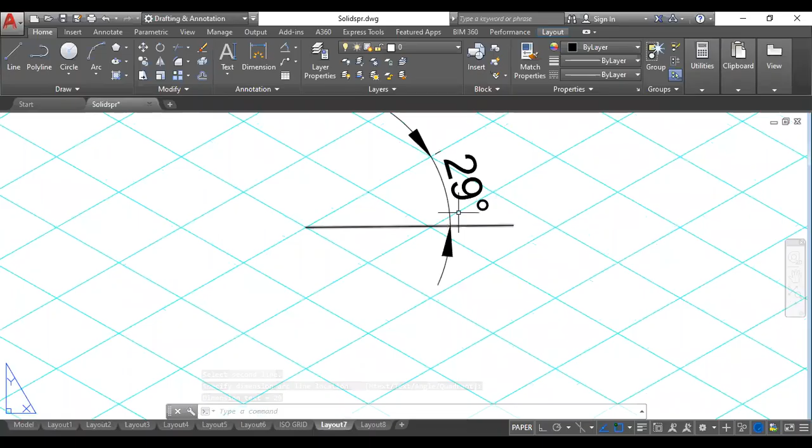If you observe these isometric sheets carefully, if I draw a horizontal line here, and if I measure the angle between this line and this line, this angle would be 30 degrees. It has not come straight, but if you measure the angle, it would be 30 degrees here.

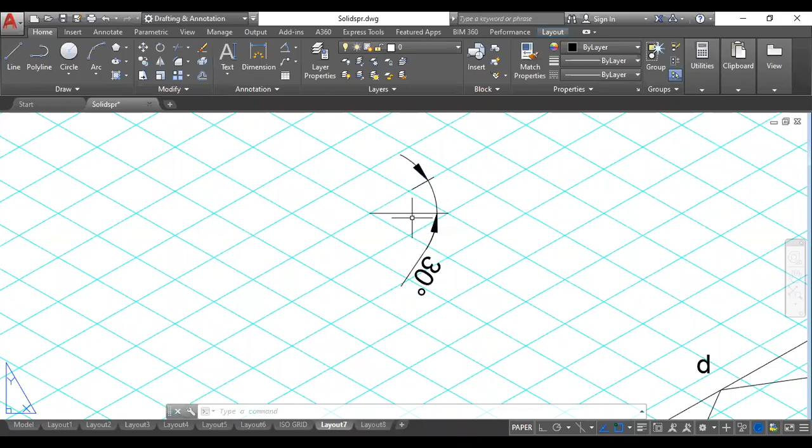So by knowing that this inclination line to a horizontal line angle is 30 degrees, you can do this on a plain sheet of paper also. For example, if you want to draw a square of 30 sides each, let us say I have a square here which is 30 sides. This is the true length.

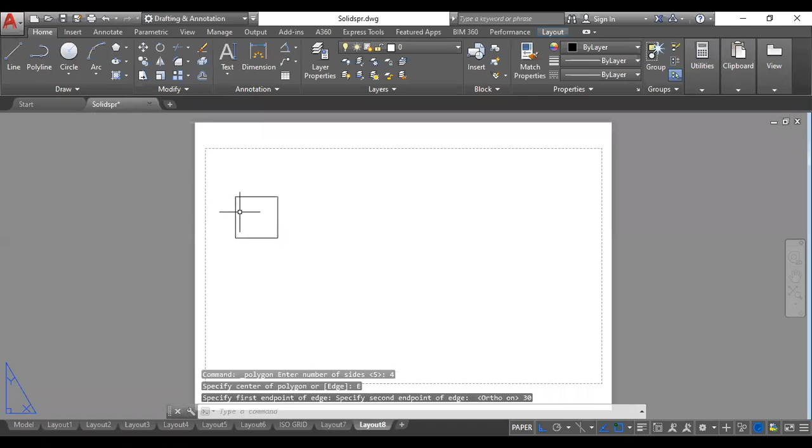So this 30 I want to draw on the isometric scale. You know that the isometric scale won't be exactly 30. So what you need to do is convert that into the isometric scale factor. It means you need to multiply 30 with 0.8164. This will give you 24.5 millimeters.

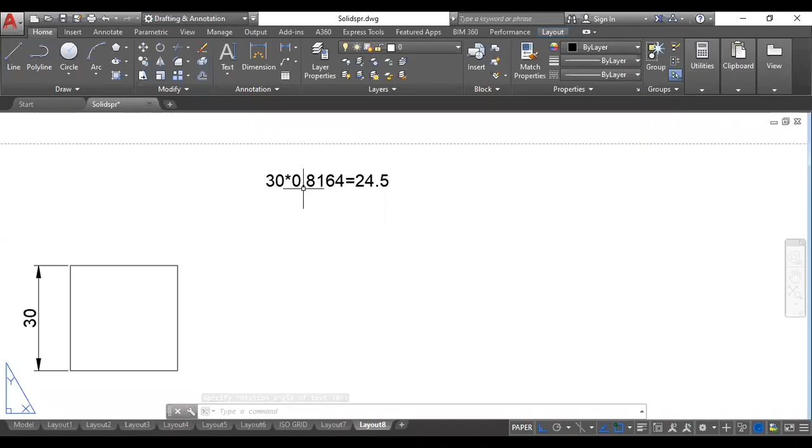So whatever this 30 length you have, you multiply it with the isometric scale factor, which is 0.8164, and you'll get 24.5. It means 24.5 is equal to 30 in actual length. So 30 in actual length is 24.5 in isometric length.

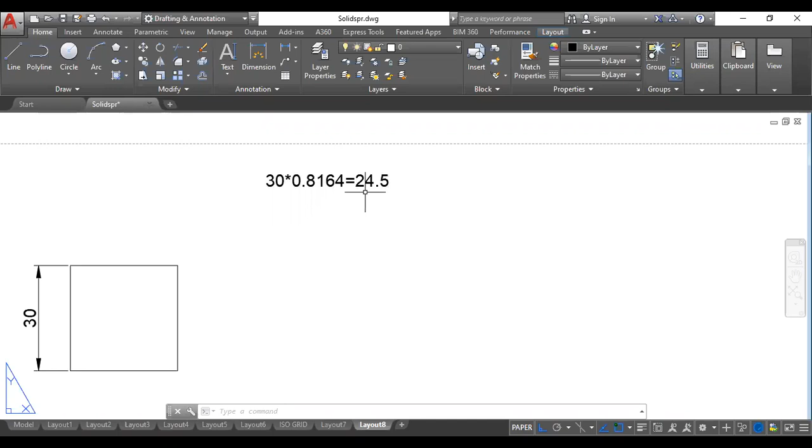So if you don't have the grid sheet, you'll have to convert the true length to iso length. 24.5 is the iso length. Now you can do it easily. Take a line command. In your manual sketch, you will draw a line of 24.5, and the angle with respect to horizontal would be 30 degrees.

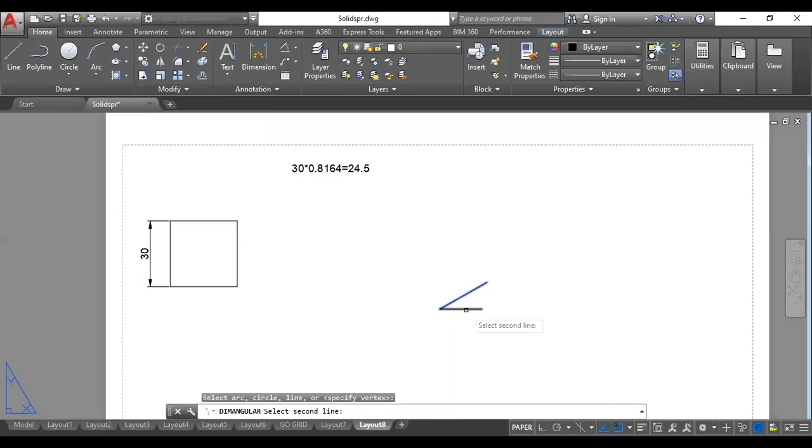If you see this particular line, the inclination with respect to this horizontal would be 30 degrees. So this is 30 degrees. Then, on the other side, from this endpoint, I want to go this side now. So this is again 24.5. Now this inclination would be 150 degrees.

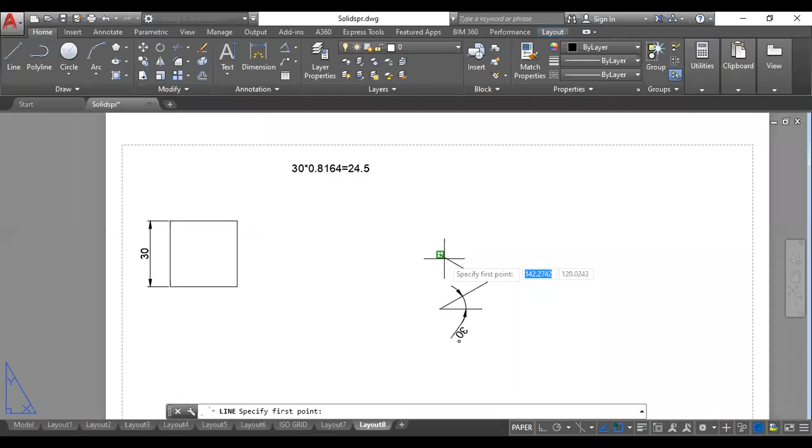You can see here it is showing already 149, if you draw it as 150, okay. So from this side to this side, if you draw it 150, then obviously the angle below will be 30 degrees again. So from this point below, you will come 24.5 again, in the counterclockwise direction this angle will be 150 again, and then you will come back to the original point and join. So this is the square what you have drawn.

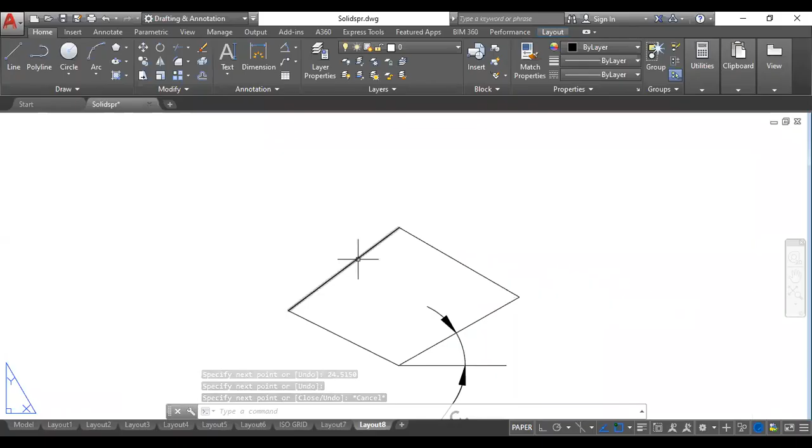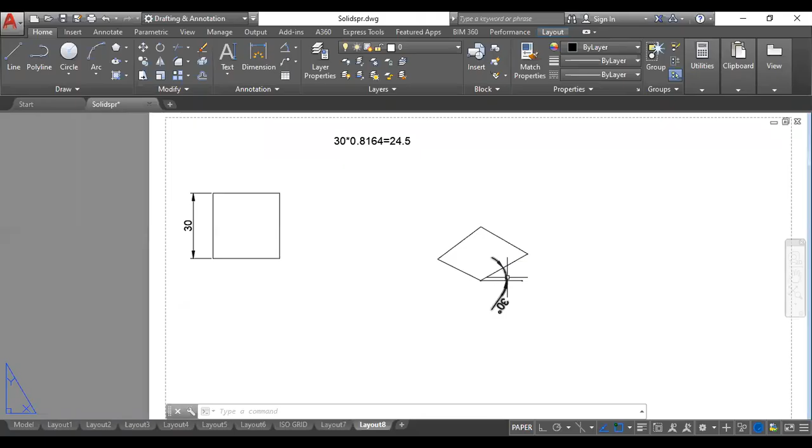One length I have given somewhere wrong, because of that it has come like this. So you can see you can draw this even on a plain sheet of paper, but the only thing is, whatever length is given, you need to convert it to iso scale first, and follow the angles. This side inclination is 30 degrees, then this line's inclination will be 150 degrees.

I'll just show you the measurements here for your clarification. This inclination, with respect to horizontal, will be 150 degrees. This line's inclination, so this should be 150. If you make a horizontal line, you'll get it as exactly 150.

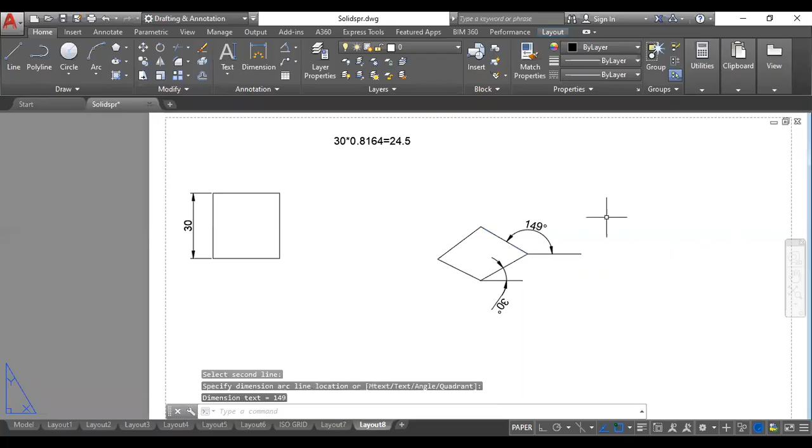So 30 from here, then this 150, then this will be 150 measured from the counterclockwise direction from this horizontal line, this will be at 150, and again you just need to join it back to the original. So it will take a little bit of time if you don't have a grid sheet, but definitely you can practice it out. That should not be any issue.

Okay, understood? Did anybody ask me this, right? So you can do it in this manner also.

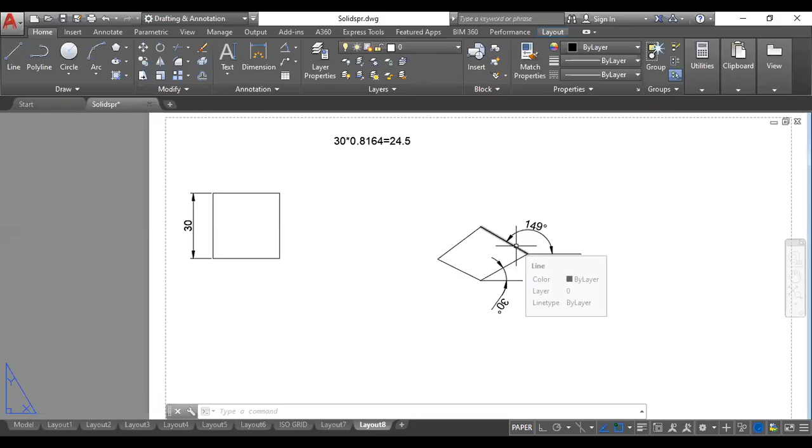Fine. So let me come back to the things where I had left.

Coming to this pentagon. We have drawn it on the right plane. Now I want to do the same pentagon on the left plane instead. So very simple, this side I need to go first.

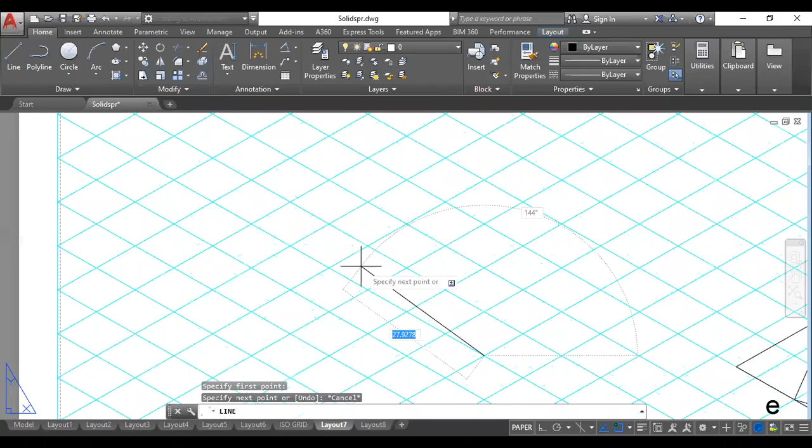Left plane means I need to start from here to the left hand side of the isometric sheet. This is the left hand side. So this side I'm going to draw 50, and above I'm going to draw 45. You need to count the boxes: 1, 2, 3, 4, 5. So this is 50. Then on top I'm going to go 45, 2, 3, 4. So somewhere here in the center would be 45.

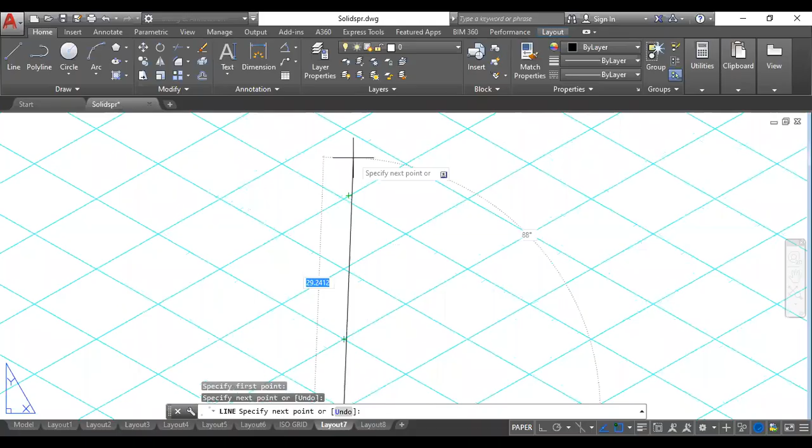In manual sketch, it will be easy. In software, it will be taking the next point. So this is 50, 1, 2, 3, 4. I'll draw it 50, then I will cut half of it again because it is taking some other point. So I'll cut this half part, so I can get exactly 45. In manual sketch, you can just directly stop at the center. So this is 50, this is 45.

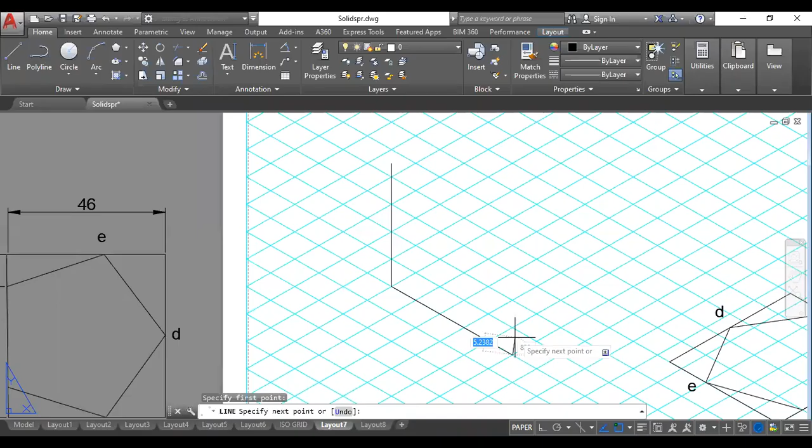Same way I can go from this side also. 1, 2, 3, 4, 45 at center, then join it back to the original point. So this is the left plane.

On this left plane, I want to draw this pentagon. So on this line, I will have A, B. On this line, I will have C. On this line, I will have D. On this line, I will have E.

A and B are 10 mm away from this point. So from here to here, at this point, I have A. And from here to here, at this point, I have B. So I'll draw one line from here to here. So AB is already marked.

C is on this line, which is at a distance of 30 mm, meaning vertically 3 boxes have to go: 1, 2, 3. So at this point where the cursor is, that is C. I'll take a line. So this is B point, and this is C. D will be exactly at the midpoint of this line. So this is the midpoint.

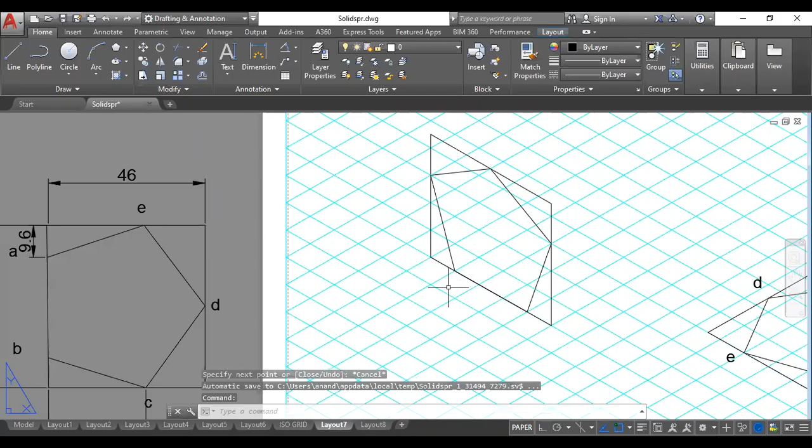It is showing there. Then again, E will be on the same line of C. So the same line of C is this, and then I'll join it back to the A point. So this is the pentagon on the left side face. You can see that C and E are on the same line because here also C and E will be on the same line. So this is how you can draw the pentagon on the left plane of the isometric drawing. Any clarifications in this?

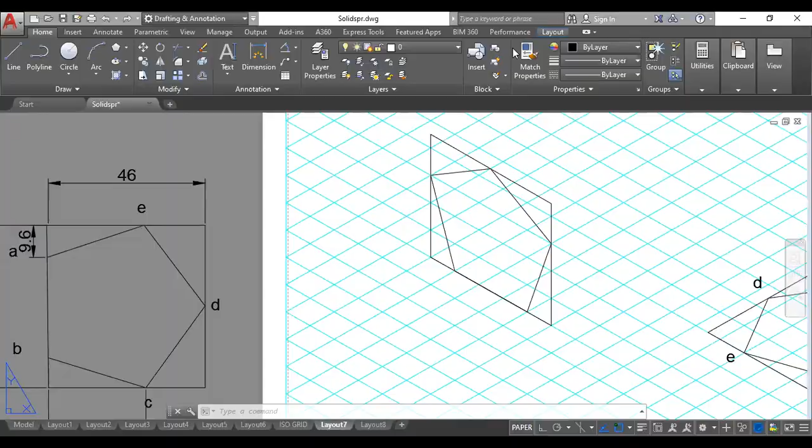Then let me go to the next part. So I have shown you how to do the pentagon. I would like to give you an exercise. You need to practice how to do a hexagon in the same manner. First, you need to draw the hexagon. You have to enclose it within a box like I have done here. Then you need to take the measurement and plot it on the isometric sheet over here.

I'll just give you a rough idea how you can make it. So first you will draw the hexagon manually on a plain sheet of paper. Let us say the hexagon is of 30 mm sides. This hexagon, you need to enclose it within the smallest possible box, right? So in this manner, you will enclose the hexagon within the smallest possible box.

You'll find out the dimensions of this box first, one by one. So one side is 60, and the other side is 52. So this box 60 by 52 you need to construct here. Now 52 you cannot get in the isometric, so you can take it as 50. So you can draw a box of 60 by 50 and then you can locate the distances.

So if I name them here exactly, starting with A, B, C, D, E and F. Okay, so I want to construct this over here.

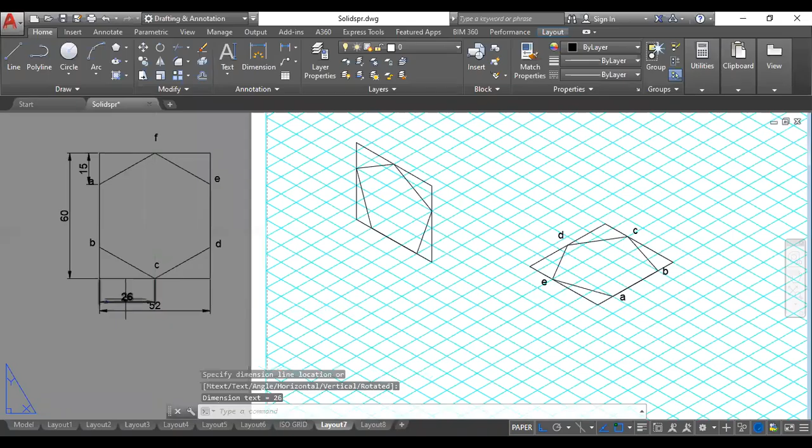In the same way, you need to locate the distance of this corner to C. It is at 26, so you can take it as 25. So from this corner to this side, C is at 25. On the same line of C, you will get F on the opposite side.

And similarly, on the same line of A, opposite you will get E, and on the same line of B, on the opposite you will get D. So you can mark all the points and get the hexagon. This I will leave it to you. Please practice it, and if you have any clarifications, ask me in the next class with respect to hexagon.

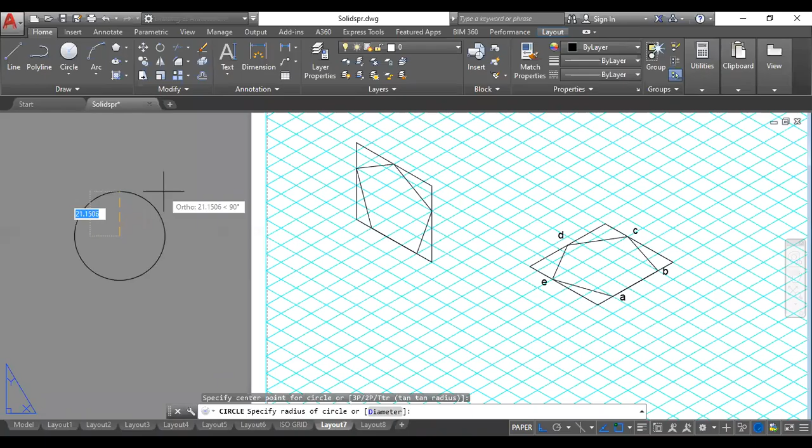Now let me explain how to draw a circle in isometric view. Let us say I have a circle of 50 mm diameter. How can I draw this in isometric?

That is the question. If you take a circle, right now this circle is showing its true length. If I tilt this circle at some particular angle and project it on the screen, how will this circle look like? Any answers? Ellipse. Yes, the circle would definitely look like an ellipse. So it means that if I have any object having circular geometry in it, when it is tilted, it will look like an ellipse in the projection.

For example, if you take a hemisphere, the top face is a circle and the bottom is the outer circumference. If you rotate this hemisphere by some angle, the top face would look like an ellipse, right? So we need to understand how to draw the ellipse in isometric. That is the point now.

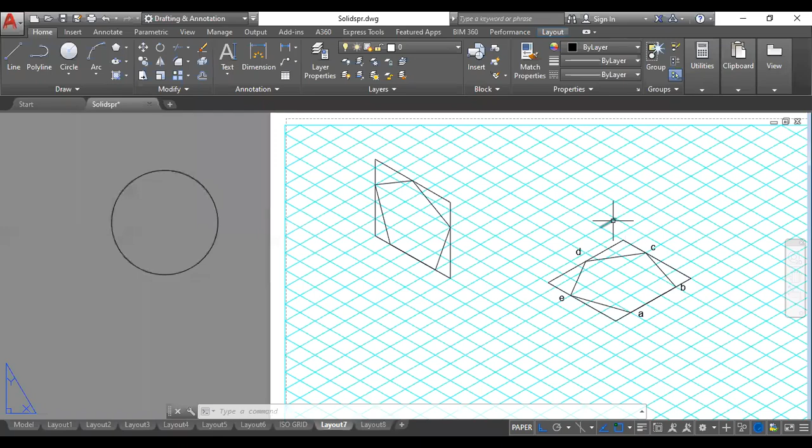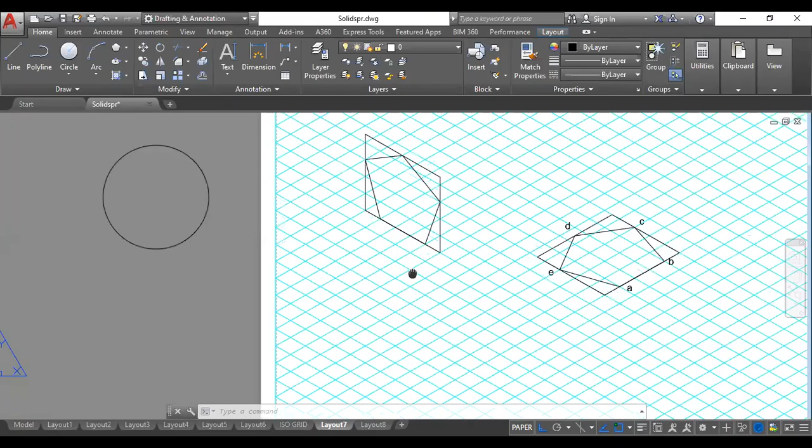I'll explain now. Look here. If you take this circle which is having 50 mm diameter, and enclose it within a box, what would be the box dimensions? Answers please. It will be equal to the diameter of the circle, correct? So henceforth it is not required to enclose it within a box, because we know the diameter is 50 mm. So directly I can construct a box of 50 by 50 and within that I can draw the ellipse.

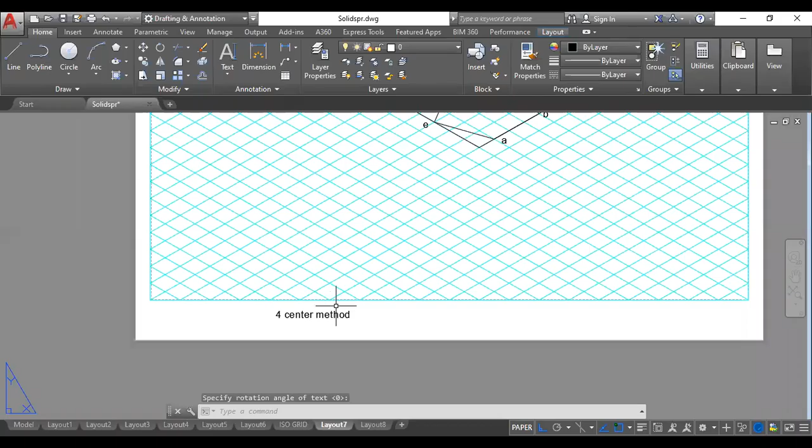So the method by which we are going to draw this ellipse is called the 4 center method. You can make a note of it. Using this method, we are going to draw the ellipse. How does this 4 center method work? Just have a look. First we will draw a box of 50 by 50.

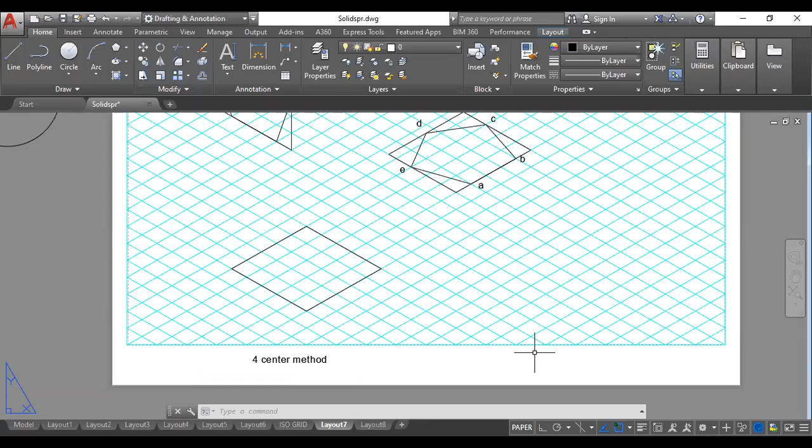50 this side, 50 this side, 50 this side, and 50 on this side. So I have drawn a box of 50 by 50 first. The name states that it is a 4 center method, meaning I need to identify 4 centers in order to draw the ellipse. Out of that, the first 2 centers would be the minor axis of this box. If you see this box, it has 2 axes, one horizontal and one vertical.

So which is the minor axis here, horizontal or vertical? Obviously this vertical line, right? This line would become the minor axis because the distance is less. So whichever you have as minor axis, those two points will become the first two centers. So this point would be center 1 and this point would be center 2. I identified 2 centers out of the 4 now.

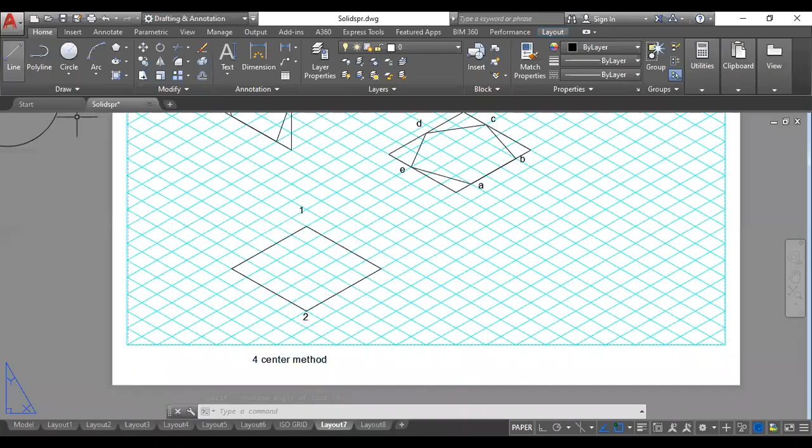So next, take a line command and draw a line from center 1 to the midpoint of this line. This line is 50, so the center would be 25. Try to understand this: I'm drawing a line from center 1 to the midpoint of this line, and another line to the midpoint of the other line. From center 1, I have drawn 2 lines to the opposite sides, exactly at their centers, since each is 50, so center is 25.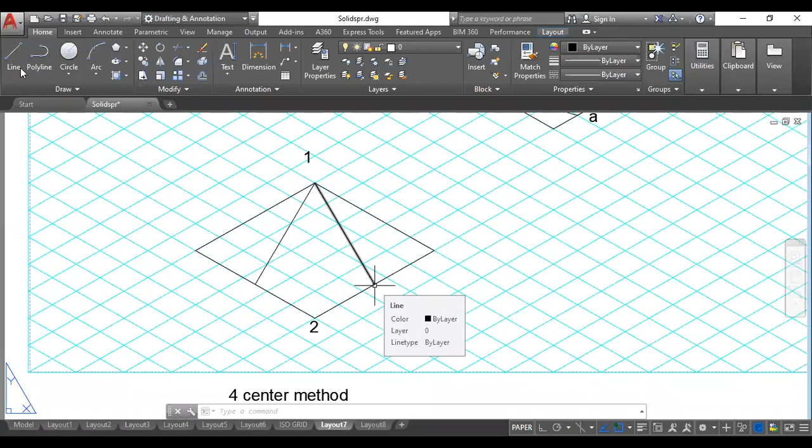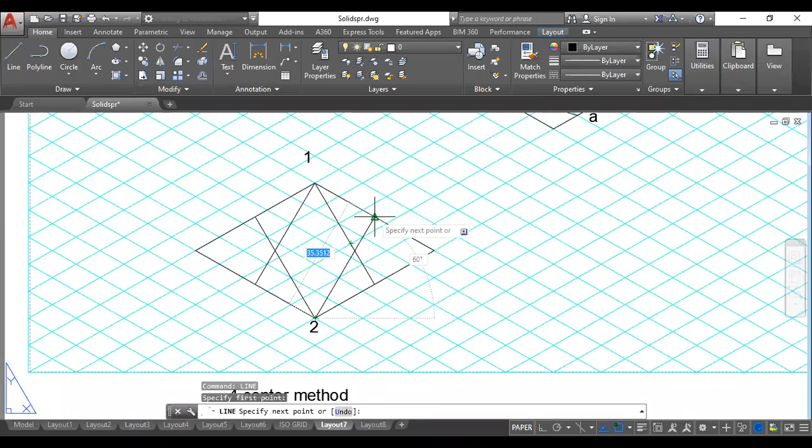I will do the same thing from point 2. I'll take a line command and draw a line from point 2 to the center of this line, and again one more line from point 2 to the center of the other line. I hope these steps are clear - from 1, I drew 2 lines to the opposite sides at their centers, and from 2 also, I drew lines to the centers of the other two sides. Now, the intersection of these 2 lines will give me the third and fourth center. This point is center 3, and this point is center 4.

So I identified the 4 centers. The junction where this line and this line are crossing, this junction is the 4th center, and the junction where these 2 lines are crossing, this particular point is the center 3.

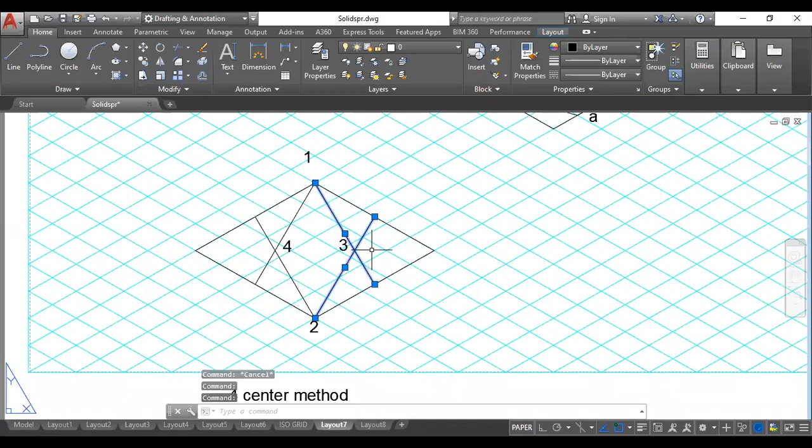So now using these 4 centers, I will draw 4 arcs. You will take your pencil and compass, then start drawing the arc.

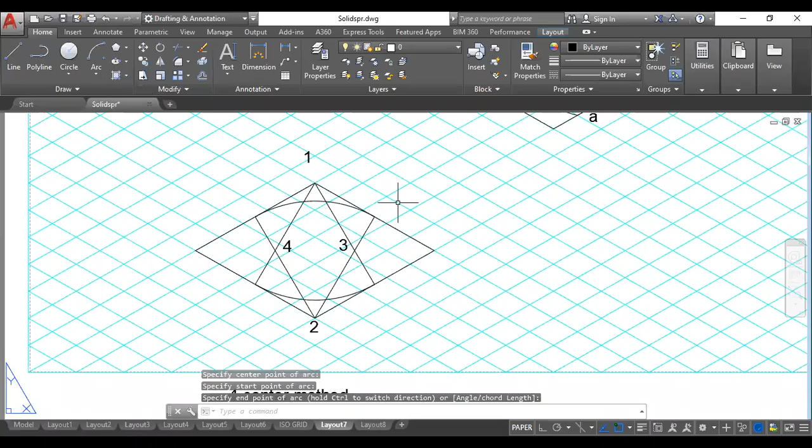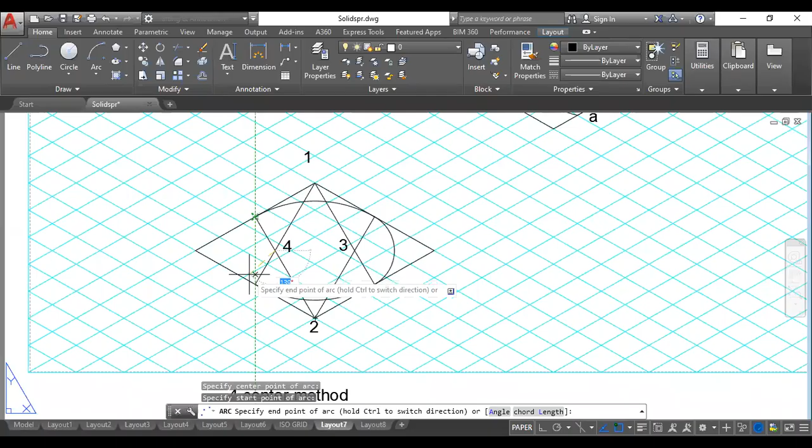With 1 at center, this line as radius, you will draw the first arc till here. Next, with 2 at center and either this line or this line as radius, you will draw the second arc. Then with 3 at center, either this line or this line as radius, you will draw the third arc. And then with 4 at center, either this line or this line as radius, you will draw the last curve. So this is how the ellipse will be drawn in isometric projection using the 4 center method.

Is it clear? You want me to repeat again or is it clear?

Sir, can't we use that tool which we use for planes and for drawing ellipse?

That's what I'm saying, whatever I'm teaching now, this is all manual method, how to draw it on the paper. In software, you can directly draw this, there is some other option. So whatever methods I'm teaching now, these are all manual methods. In the manual method, you have to follow this only, you cannot draw the ellipse directly.

Is it clear? Okay, any other queries?

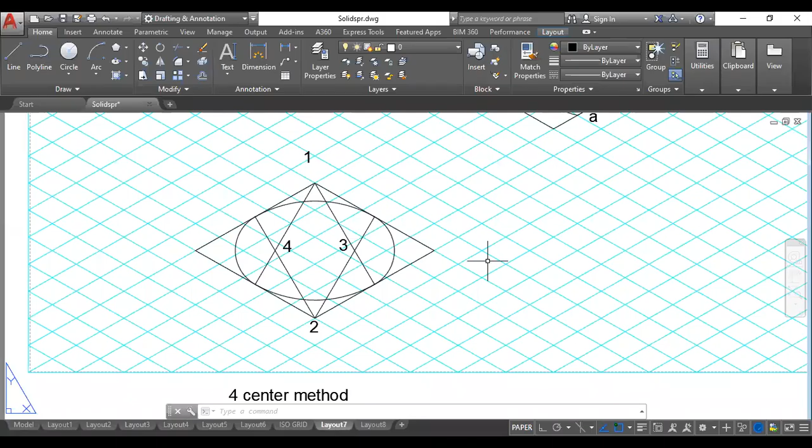Okay good, now this is the ellipse in the top plane. If I want to draw the same ellipse on the right side or left side plane, it would be a little bit tricky for the first time. So just have a look here, I'll make it easy for you.

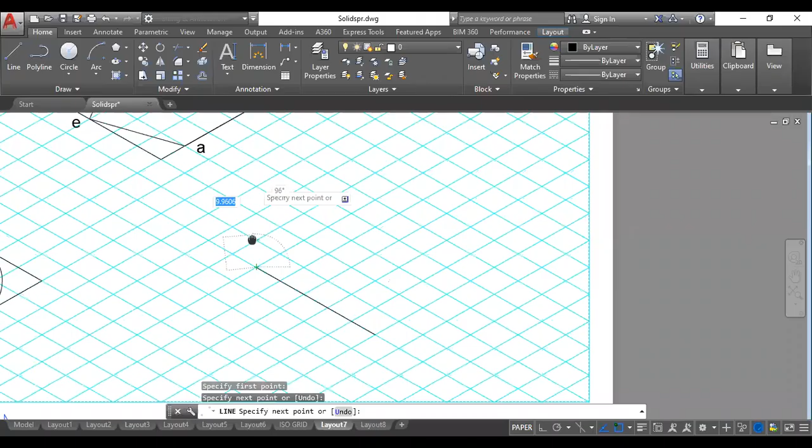So let us say I want to draw the ellipse on the left plane. From here I will go on the left hand side, taking 50 mm same length. So I constructed a box of 50 by 50 here, right?

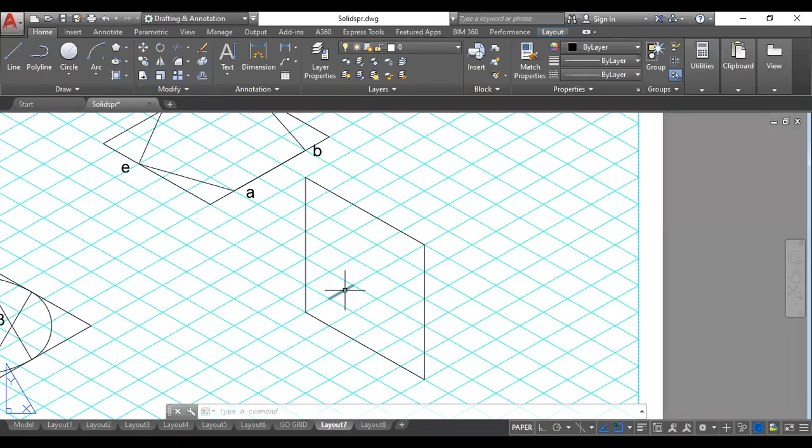Now here, the minor axis and major axis, first thing you need to identify. So if you look here, the minor axis is from this corner to this corner, this line I am highlighting here. Agreed? This is the minor axis, and the other one is the major axis.

So whichever is the minor axis, that will give me two centers. So according to that, the two centers are this. This is the first center and this will be the second center, correct?

Same thing I will repeat from 2 to this, and same thing I'll repeat from 2 to this side. So from 2 also I have drawn a line from here to the mid, and from here to this line mid. So the new intersections will give me 3 and 4. This intersection is center 3, and this is center 4.

So now using the pencil and compass, we'll draw the arcs. So with 1 as center and this as radius, I'll draw the first arc of the ellipse, right?

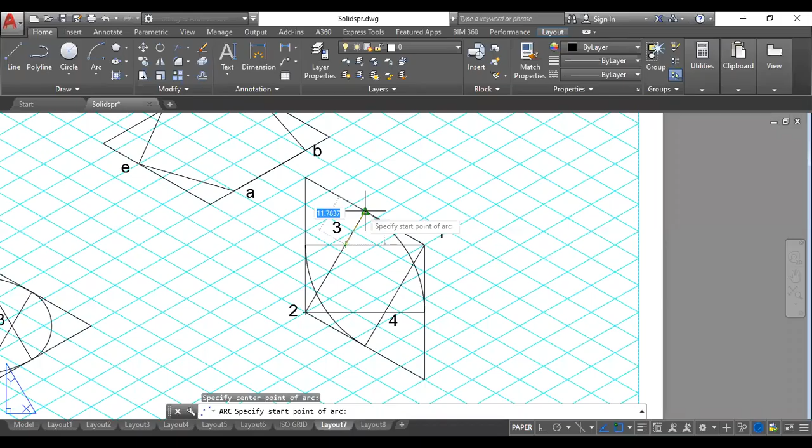Then with 2 at center, then this has radius or this has radius, both will be having the same length, I'll draw the second arc. Then with 3 at center and this line as radius, I'll draw the third arc. And then with 4 at center, this as radius, I'll draw the fourth arc.

So this is the ellipse in the left side plane. So you can make out the difference, this is top plane, this is left plane.

Understood the procedure? No need to worry if you're not getting it the first time. I'll be posting this recorded video in the group once again, so I recommend each one of you to go through the video one more time and try to understand this.

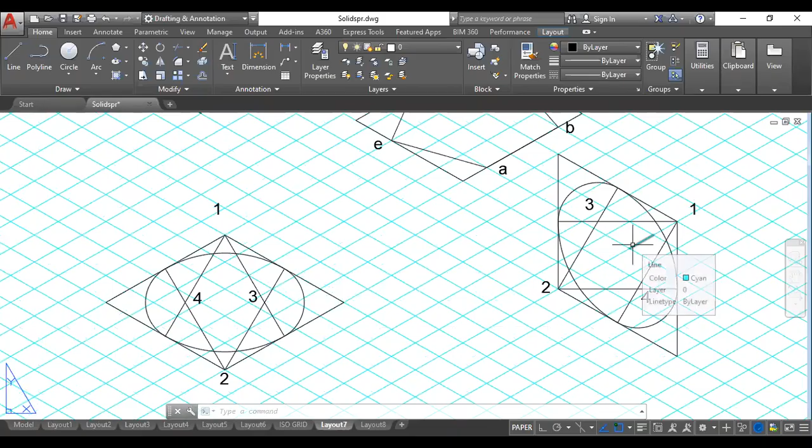Because if you know how to draw the basic shapes in isometric, then all the problems will become very simple for you. If you know how to draw this particular ellipse, you can draw the sphere, hemisphere.